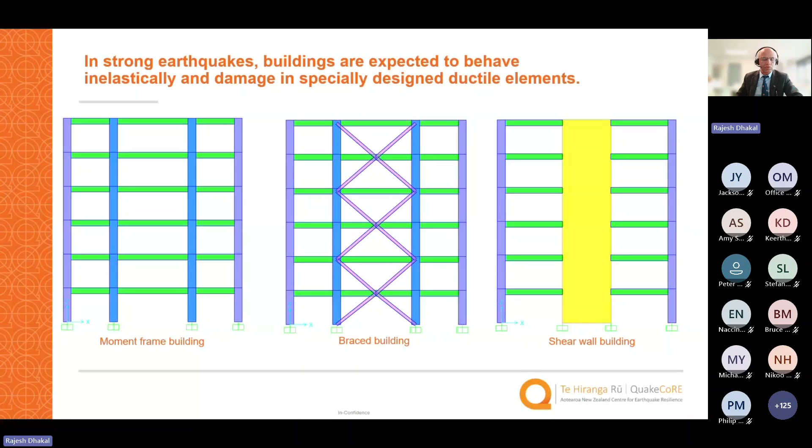And in strong earthquakes, stronger than design earthquakes, obviously there will be quite significant damage to these structural components, making it dubious whether they can be repaired and restored to their pre-earthquake level or not.

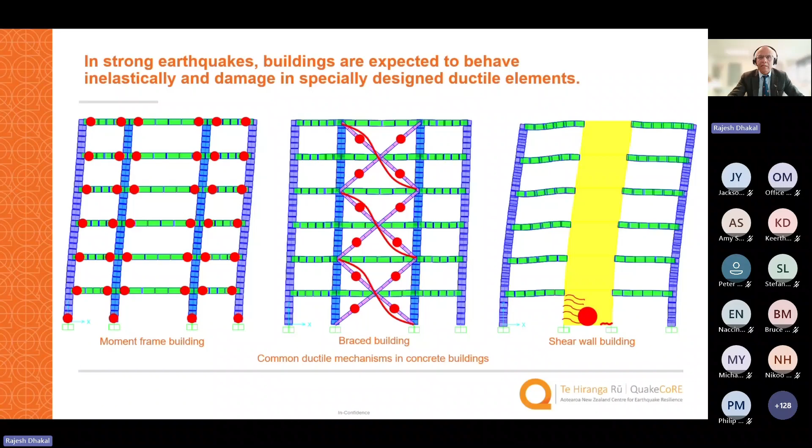Here are some illustrations of common structural systems. Damage in concrete structures, as you all know, is not easy to repair, mainly because of two things. One, by nature, concrete gets cracked. But inside the reinforced concrete, once they develop plasticity, the elongation, the permanent extension of those plastic hinges makes it difficult for these hinges to be repaired and look like the original members they were before the earthquake.

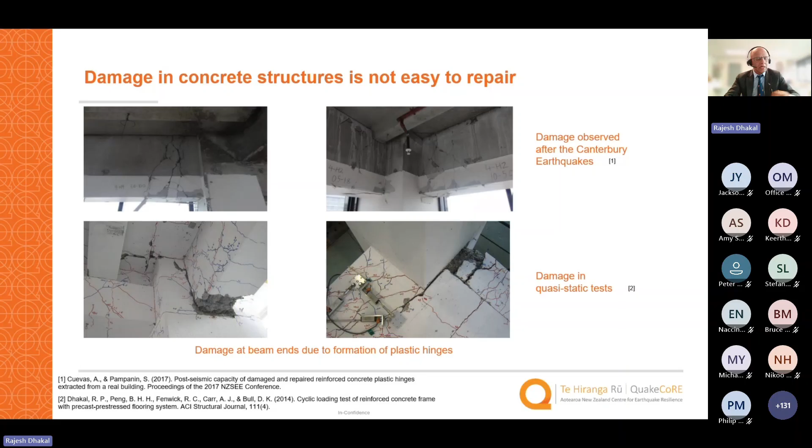So in particular, when this damage does happen to floors, that makes it even more tricky and challenging to repair. In most cases, barring some exceptions, once the floors get damaged, the buildings end up being demolished and rebuilt.

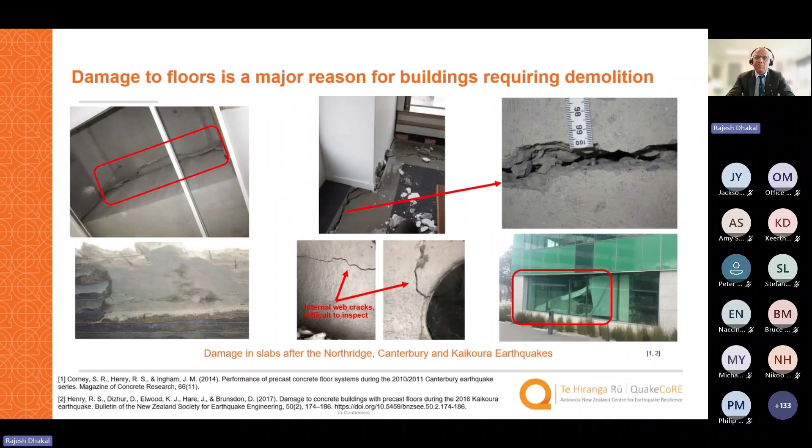We have seen several examples of this in recent earthquakes, be it the Canterbury earthquakes or even the Kaikoura earthquake, where buildings in Wellington and Christchurch underwent significant damage to floor systems, and that was one of the main reasons why these buildings had to be demolished.

Precast construction is one of the common forms of construction, especially for concrete buildings. Do precast construction techniques help in getting rid of this problem? Let's revisit that. The concept of precast construction is to assemble prefabricated components, but traditionally using on-site concreting for connecting the prefabricated components, and the end product is a monolithic connection.

The claimed advantages are quicker construction, because you are not casting a lot of the structures and members on site; better quality control, because the prefabricated components are made in a quality-controlled environment in the factory or yard; and obviously less on-site labor and formwork.

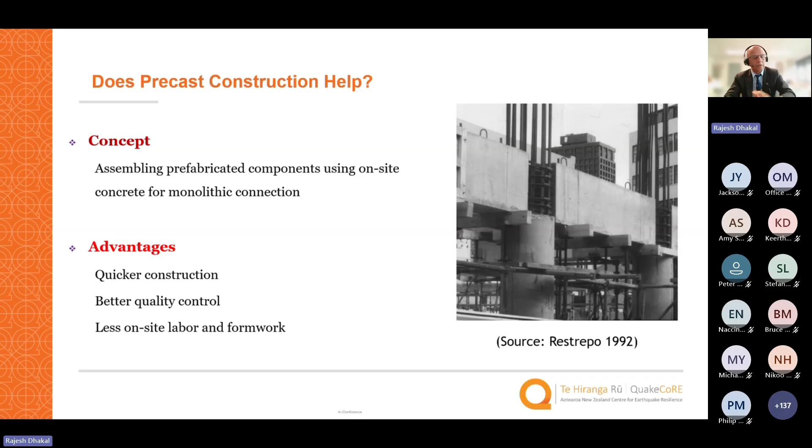However, the conventional approaches of assembling precast buildings by pouring concrete on site to connect different components is actually counterintuitive in terms of those claimed advantages, because that requires formwork and curing time for those on-site concrete joints, which delays the construction process and doesn't give the advantage of rapid construction as much as you'd like.

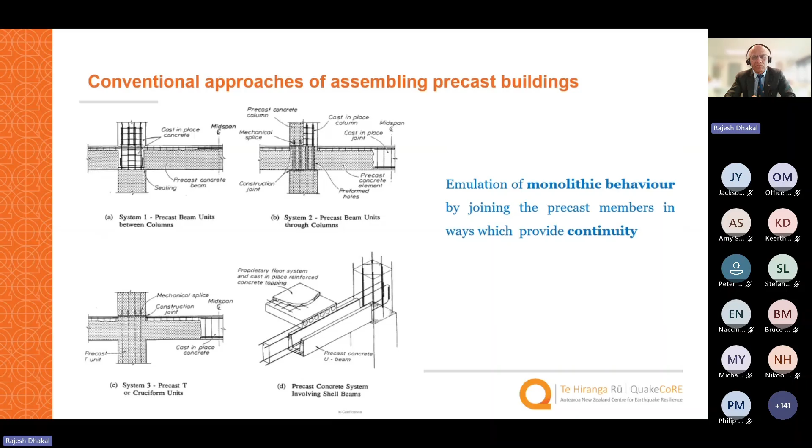There are several issues with these monolithic precast structures, or even traditional reinforced concrete construction. The first is that these structures require demolition whenever there's significant damage after an event, or even without damage, if the property owner decides to change their plan or modify the structure's functionality. More often than not, that has to be done through demolishing the building and building a new one.

Demolition by nature is a very disruptive process environmentally, causing significant wastage of materials which are non-biodegradable. That just adds to the landfill. It's a time-taking process, and it costs a large amount of money and energy.

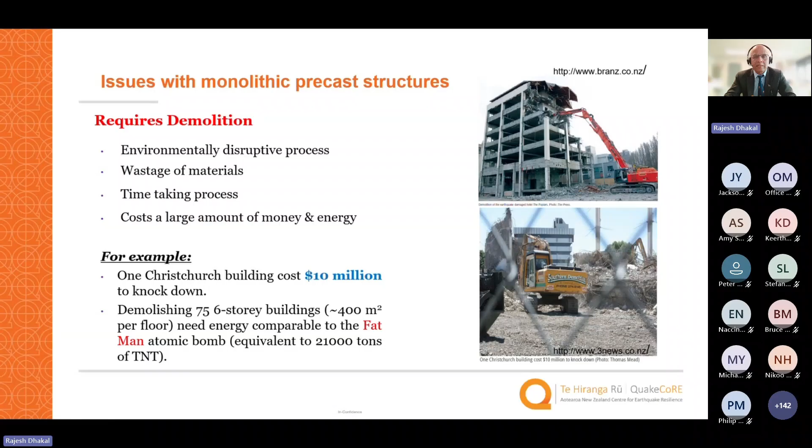The other issue with monolithic precast construction, the one we are directly dealing with in this research, is vulnerability of precast floors. Precast floors are connected through a topping slab with the structural members, as is traditional practice. Such connections invariably get damaged in minor to moderate earthquakes—you don't need a large earthquake for them to start creating cracks and incompatibility-induced damage around the perimeter.

If the seating is limited, like for precast floors seating on the end beams, then because of elongation, they can fall, which can lead to life safety hazards. Repairing floor damage is often very uneconomical and impractical. Whether it's technically feasible, we don't know—there's a big question mark over that. But most of these buildings have been forced to be demolished after moderate to major earthquakes.

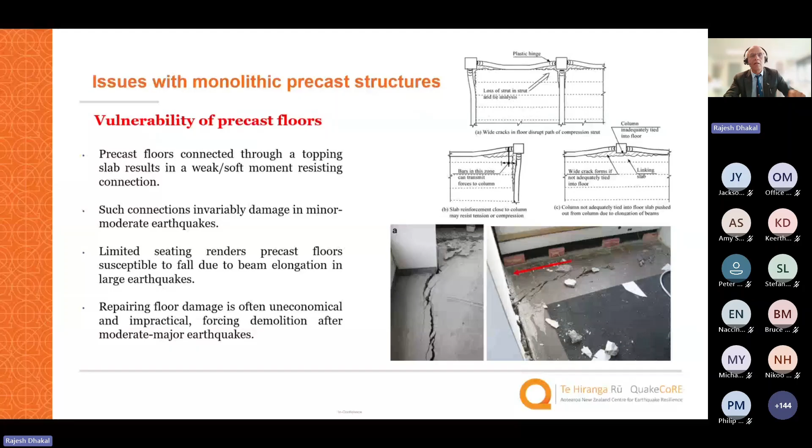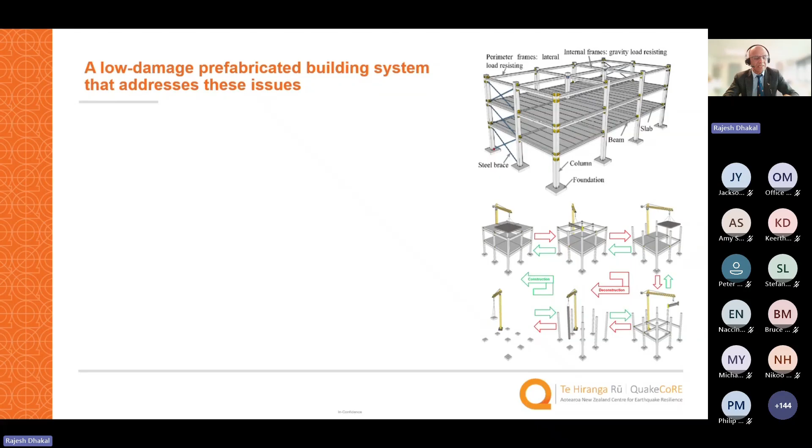We are working on a low damage prefabricated building system that addresses these issues and several others inherent with monolithic precast construction. The first issue is construction speed—traditional precast construction limits this advantage, but the system we're proposing is faster because it uses dry steel connections to connect structural members, between floor and frame, floor and wall, beam to column, column to foundation, etc. It completely avoids on-site concreting.

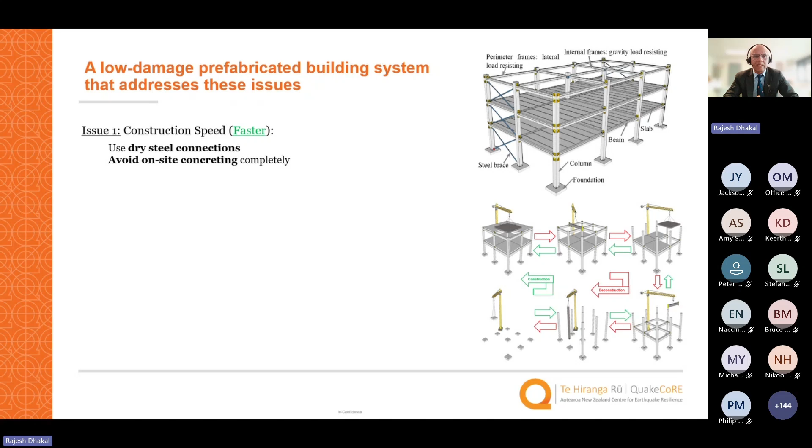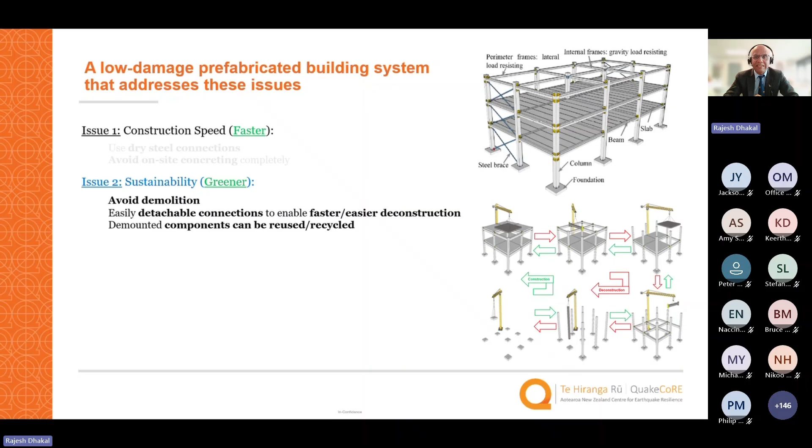The second issue I mentioned is sustainability. This system is greener because it completely avoids the need to demolish. It uses easily detachable connections to enable faster and easier deconstruction. You can detach and demount components, and these components can be reused and recycled when another opportunity arises where the same type of connection or members are needed.

The third issue is the vulnerability of precast floors that I talked about. The system we're proposing is safer because it avoids the topping slab connecting with perimeter structural components, meaning the floor is connected to the structure through discrete floor-frame connections made by steel members. So we don't have that vulnerability typical of monolithically constructed precast concrete structures.

The other issue is lack of seismic resilience—in order to build back the building after some damage, because in concrete buildings, we've seen the majority of damaged concrete buildings being demolished and rebuilt. This system will make buildings more resilient because it uses low damage connections to join structural members between floors, beams, columns, etc. So in moderate or even large earthquakes, the damage will be heavily minimized.

But when you have very large earthquakes, the damage will have to occur somewhere, and we limit that damage to easily detachable and replaceable components. So rather than thinking about repair, we replace those damaged components, and in a short amount of time we get a building similar to what it was before the earthquake. There's no ambiguity about whether you can repair it back to the pre-earthquake level, because in this case you're replacing the damaged components, so everything is like new.

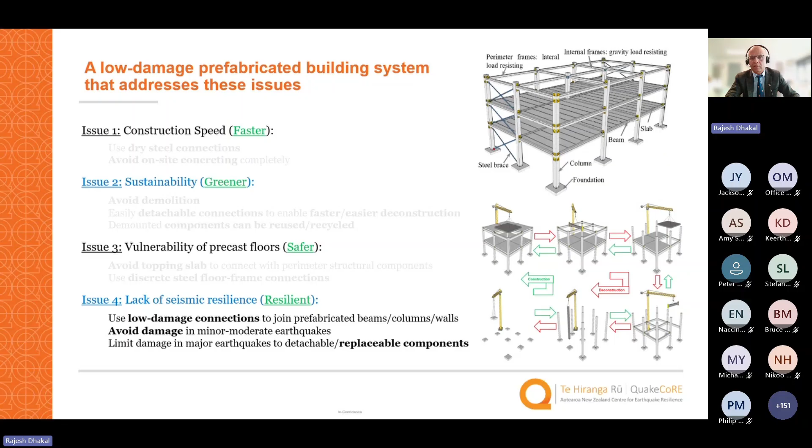So precast floors are vulnerable mainly because of the way they are connected. This is the hypothesis I'm making: even if you use a very stiff steel plate as your flooring system, if you connect it the way we traditionally do, the floor will still get damaged. So it's not about the precast flooring member—it's about how we connect them to the surrounding structure. That is the main reason we're getting damage.

The way we use topping slabs with lightly reinforced mesh, with the reinforcing bars going all the way to the end beams, creates a moment-resisting connection between the floor and the beam, which is weak and fragile.

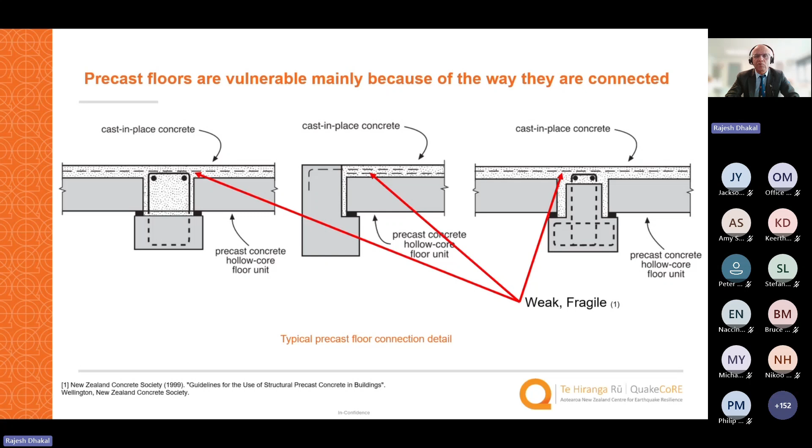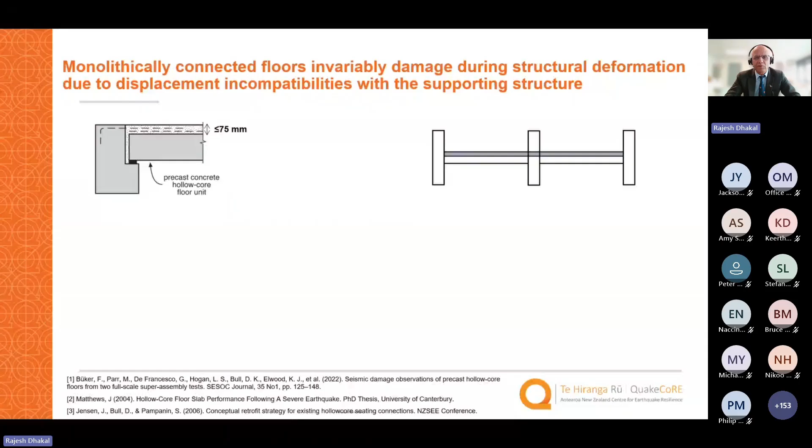So the moment resisting connection has very limited capacity to withstand rotation and moment. Because of that, what we have seen is the monolithically connected floors invariably get damaged during structural deformation in minor to moderate earthquakes, mainly because of displacement incompatibilities with the supporting structure.

All of you have seen these kinds of illustrations showing the negative moment failure and positive moment failure in several other presentations about precast floor and hollow core floor in particular.

When the building has to deform in one direction, there will be negative moment developed in that connection, which will create damage starting from the top. And when in the other direction, the positive moment that develops will create cracks from the bottom of those floor slabs.

Not only that, when the buildings deform, the beams try to deform in that typical elastic double curvature, even in the elastic range, whereas the floor doesn't want to follow that same pattern of deformation. So in that interface between the floor slab and the beam, there will be a lot of conflicting stresses developed, which will create quite substantial damage at that interface.

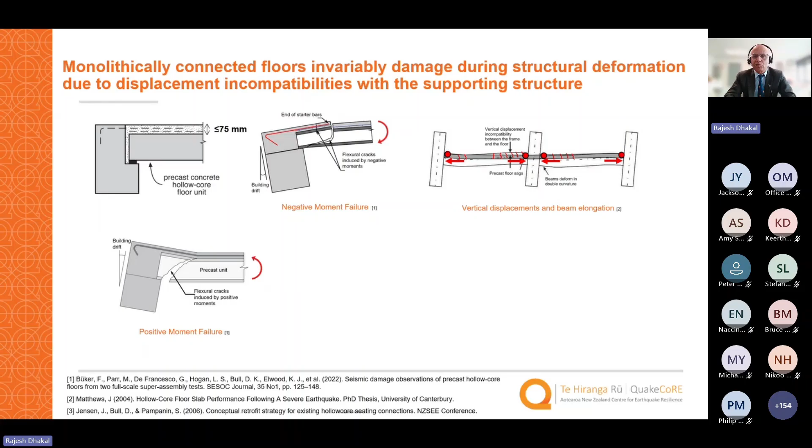Not only that, when cyclic loading takes place, the ends of the beams where plastic hinges develop, these hinges grow in length, which we call beam elongation. So the columns are trying to move apart because the beam is getting longer and pushing the column outside, and that creates another type of stress in the floor, which is connected to the beams, exacerbating the damage even further.

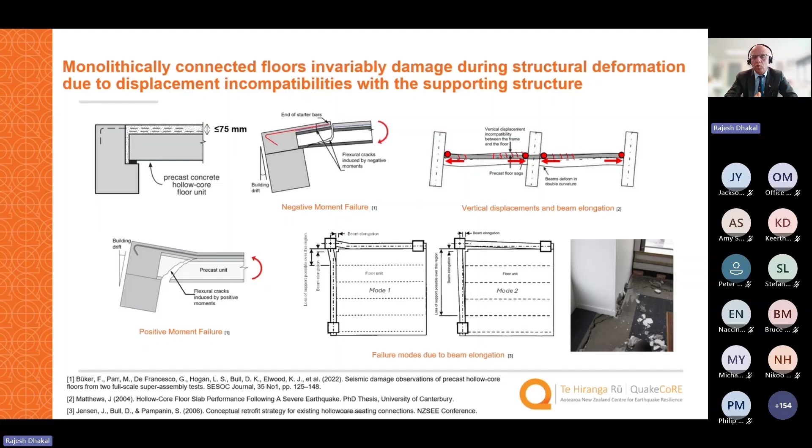We have seen this kind of illustration based on concept, as well as in the Clarendon Tower in Christchurch, where exactly this type of damage around the column in the floor-beam interface was visible after the Canterbury earthquakes.

The design challenge associated with monolithic slab frame connection, in addition to the issues talked about earlier, there is a further issue related to strength hierarchy and seismic performance, which can be compromised. In capacity design, strength hierarchy is important. Beam being weaker than the column is important because we want to control the performance of the structure through well-detailed plastic hinges in the beams.

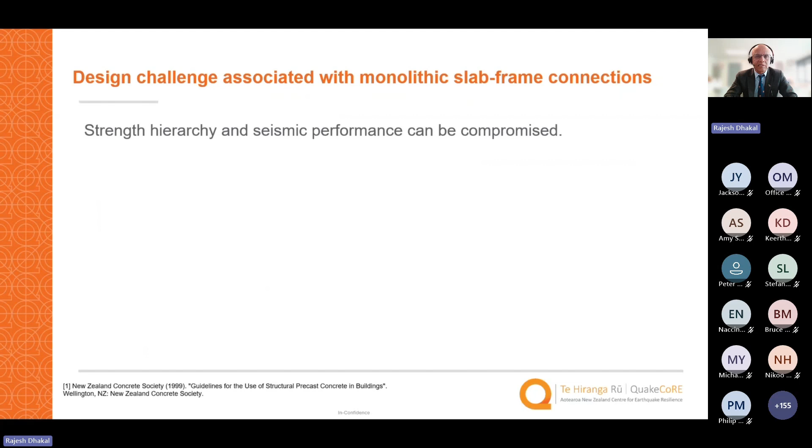Beams getting stronger, in isolation, you might think this is good, that we're getting better performance out of the beam. But at the system level, beam getting stronger than the columns will be a disaster, because that will lead to an undesired column failure mode.

That is a typical problem that we get because of these monolithically connected floors. When you have floors connected to beams monolithically, then a part of the floor will participate in the beam strength, especially the negative strength of the beam. But how much of the slab contributes to the beam? That's a question with a lot of uncertainty.

If you look at the New Zealand standard, Japan standard, or US standard, they each give an equivalent width of the slab in a different way, leading to different outcomes. Not all of them can be right—only one of them can be, and even if one is right, the others are wrong. That creates quite a bit of risk in terms of beam strength.

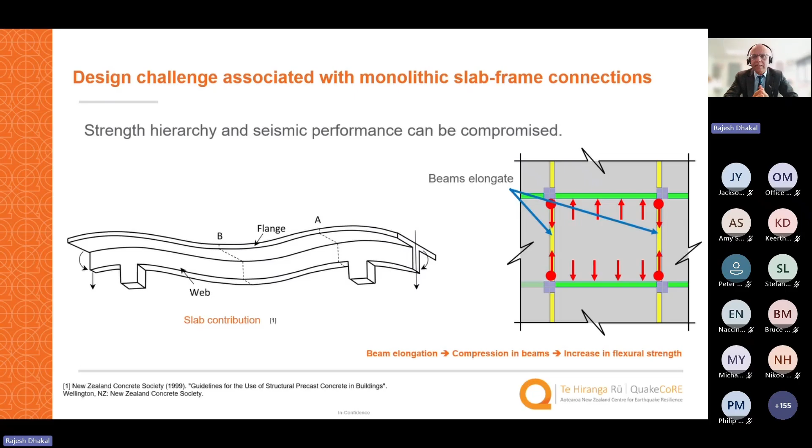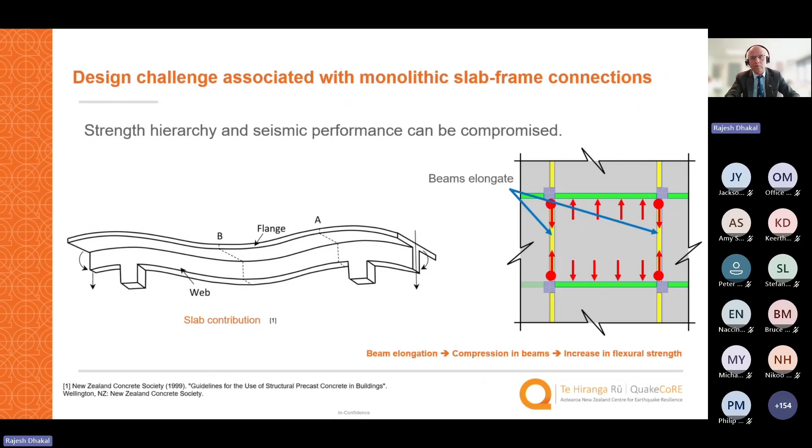Not only that, when the beams elongate and try to push the column outside, the column tries to resist it, so axial compression is developed in the beam. When there is axial compression in the section, the moment capacity is higher—you can confirm this through section analysis. So these two things tend to increase the beam strength, which can alter the strength hierarchy and even the failure mode of the building, which is undesirable.

So in order to solve these issues, we have proposed a low damage floor connection. In this research, we are focusing on this aspect, which feeds into the bigger aim of getting a low damage prefabricated building system as a whole. But here we are concentrating only on the floor to frame connections.

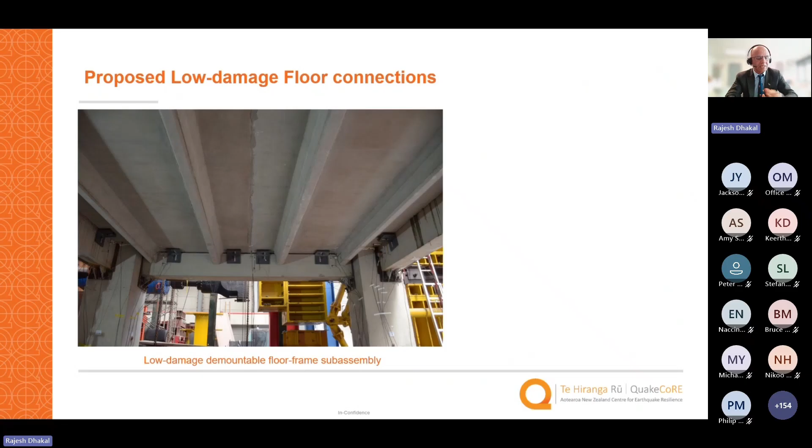In this connection, the floors are connected to the surrounding frame using steel angles which have slots in two directions, as shown in this figure. These angles have a rubber bearing strip below the floor, a slotted hole where a bolt is installed in a duct in the slab, and another vertical slotted hole where a bolt can be cast in the precast beam.

On both sides, in the end beam you can see some stiffeners in the connection there. Let me see if I can show you.

No, I cannot activate the pointers.

You can see the end beams and end connections. They have stiffeners because we want those connections to act as a backup in case unseating happens, a backup for the gravity system, so that the floor doesn't fall down. It is extra redundancy in supporting the floor. So this is the concept we want.

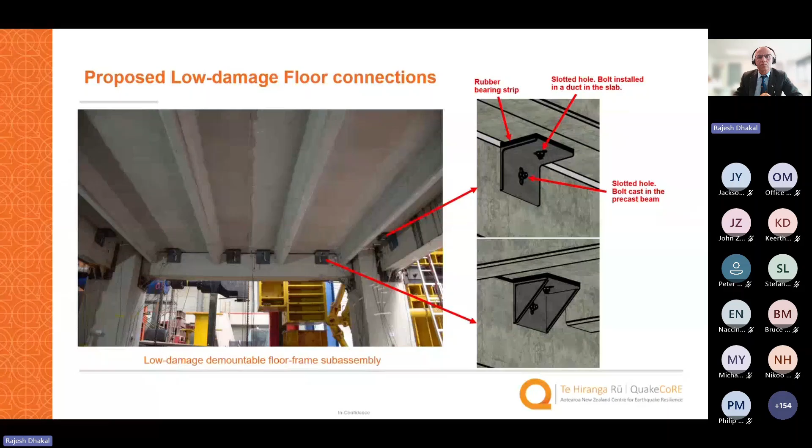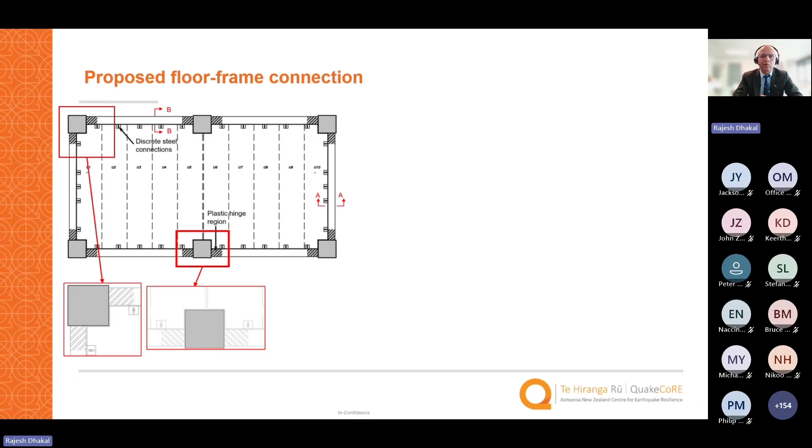The proposed floor frame connection, the floor looks like this in the surrounding structure, with connections all around the perimeter. The key feature is that we don't put any discrete steel connection at the beam end where plastic hinges form, because elongation there could disrupt these connections or pull the floor together when the beam elongates. So these connections are all outside the plastic hinge region.

That's the first point. Second, this is how these connections are placed at the two ends, in section AA and section BB. When the beams rotate in the two directions, there is no positive or negative moment failure, because the connections, especially with the slots in the two directions, can easily accommodate the relative movement between the edge of the floor and the beam. Similarly, in the other direction, the same thing happens.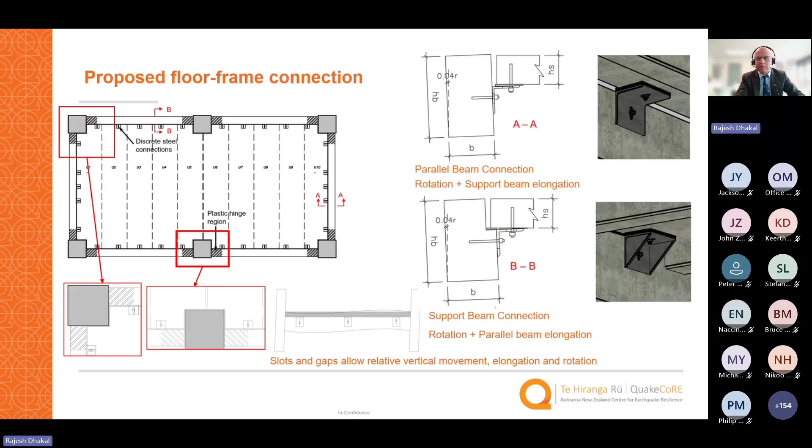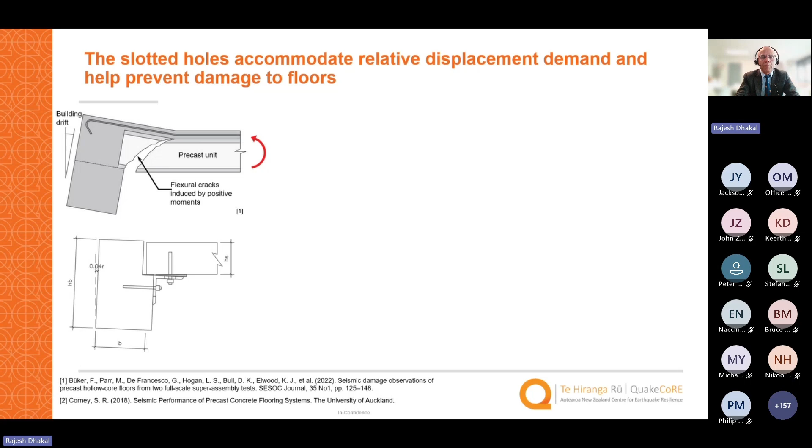So it has the ability to withstand the relative displacement demand between the floor and the supporting beam. The slotted holes accommodate this relative displacement demand and help prevent damage to the floors. Instead of the positive moment failure seen in traditional floors, now the floor and beam deform as shown below in the illustration. Similarly, instead of negative moment failure, the beam just moves outside, and the rubber pad underneath allows some deformation to accommodate that rotation, along with the slot.

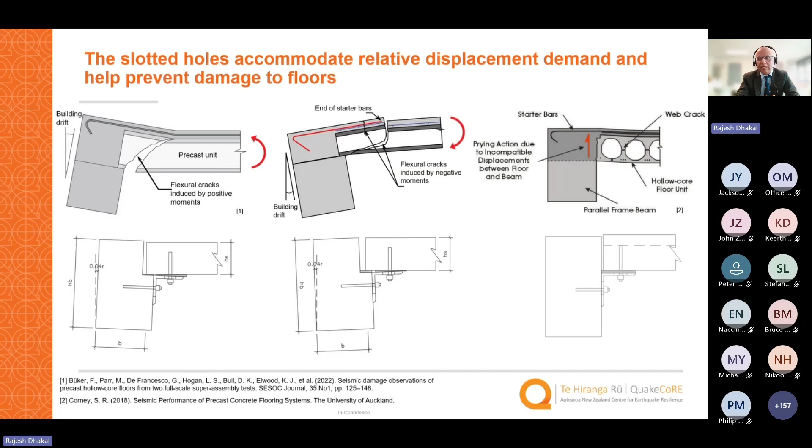Also, looking at the side connection, because of how the side of the floor connects to the beam, there is no need for them to behave monolithically, so any additional deformation can be accommodated. The connections are there to transfer the inertial forces, unlike traditional flooring systems where inertia is transferred throughout the perimeter through the monolithic connection.

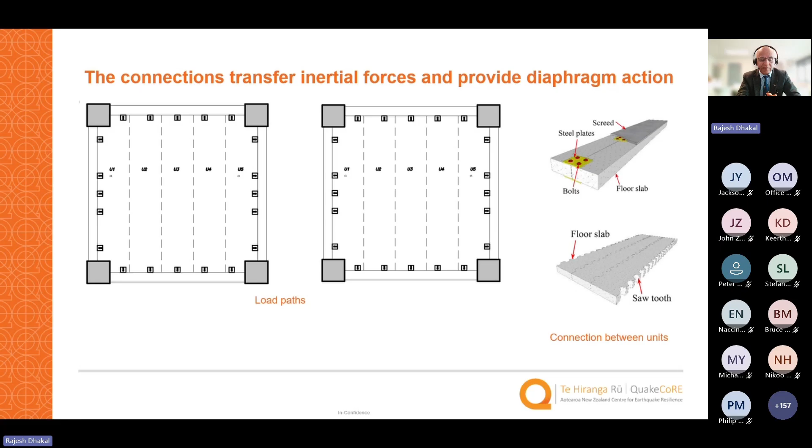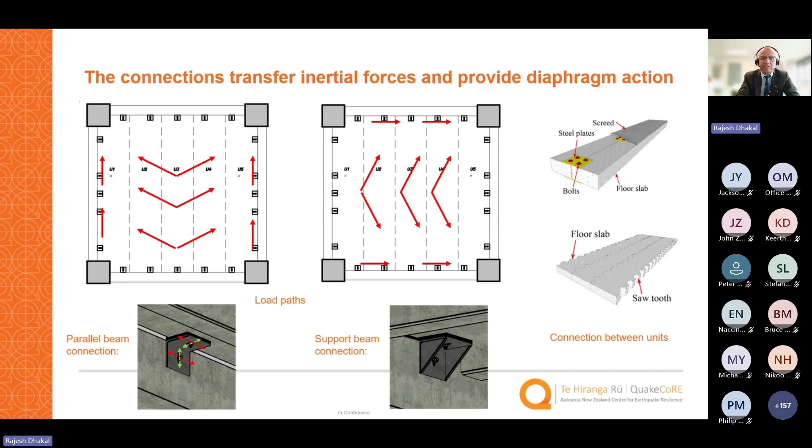In this case, the inertial forces are transferred through those discrete connections. If you recall, these connections have movement in the direction where inertia needs to be transferred that is restricted. We have slots in the other two directions allowing relative displacement, but in the direction shown by the red arrow in the bottom figure, there is no room for the floor to move, because any stress developed there is transferred directly through that connection to the beam. That's how the inertial force is transferred.

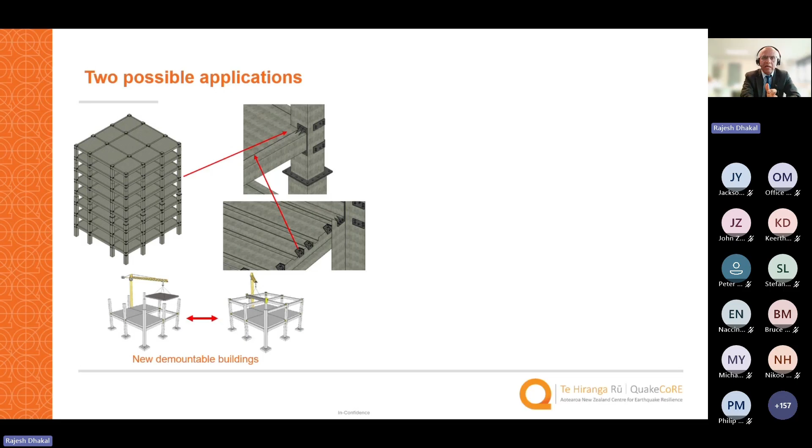This kind of connection has two possible applications. The first is in new demountable buildings where the precast floor slab is put on top of the beams, and then connected from the bottom using these connections, as shown in the new prefabricated building system. The second application is retrofitting existing vulnerable buildings with precast flooring systems. So how do we do that?

You put these connections underneath and fix them to the floor and the beam with post-anchored drills, using epoxy injected drills or another post-anchoring mechanism. Then you cut the monolithic connection between the beam and the floor, and fill that with compressible material. With that, you get exactly what we would normally do in new buildings.

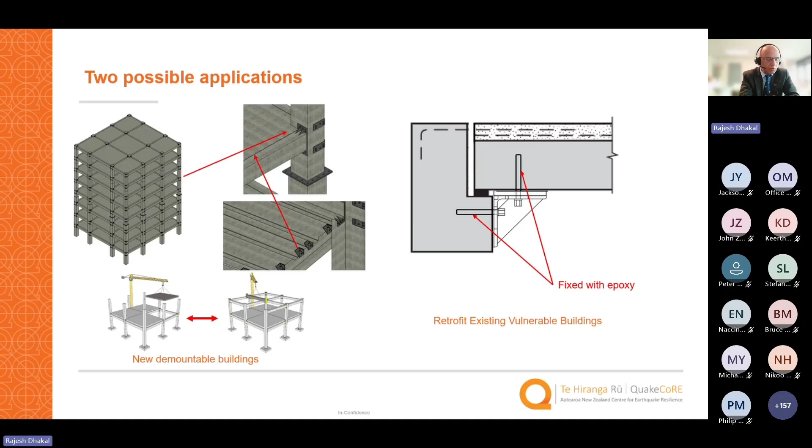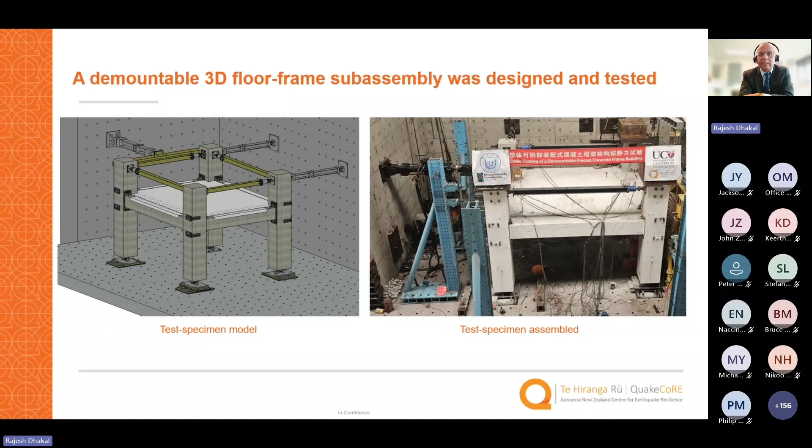The precast beams and columns, especially the beams, were cast with an end plate which had holes to bolt them and connect to the column. The columns were prepared with pre-installed holes to take those bolts through, and reinforcing bars were welded to those end plates, which also had stiffeners as shown.

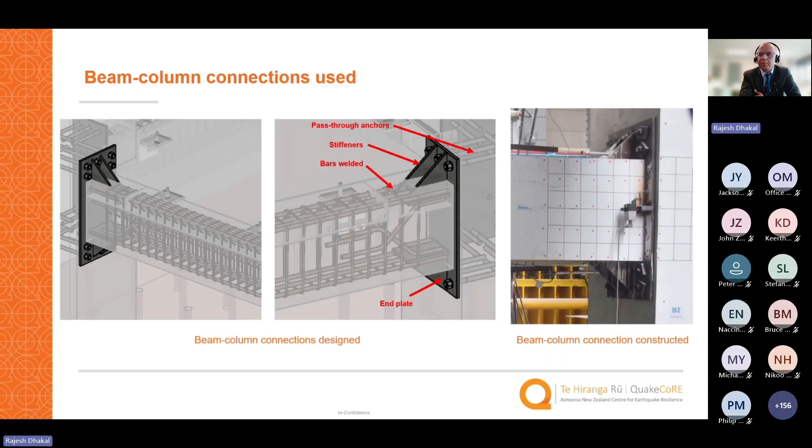When they were fabricated and then connected at the site, this is how they look. The end plates were connected to the column face by bolting them through the holes already provided on the precast columns. After all the assembly of the four beams and four columns, this is how the specimen looked.

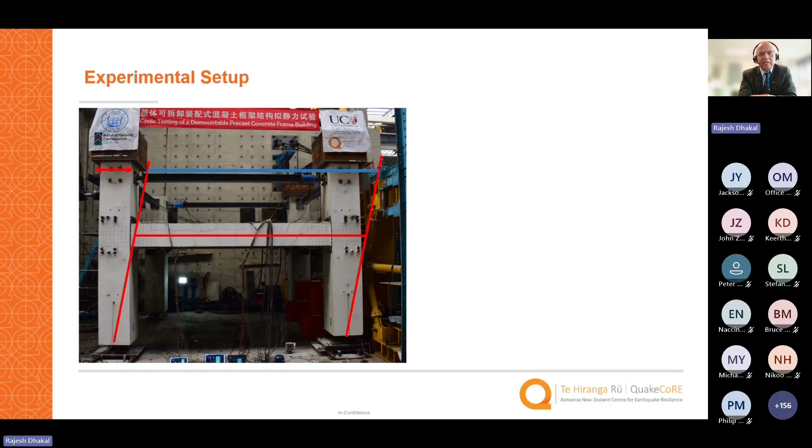But there are some challenging bits here, because we wanted to test it in unidirectional as well as bidirectional cyclic loading. When you do that, beams will elongate, and in order to not restrict the elongation of the beam, the bottom support of the columns had to be carefully designed. So out of the four columns, one column in one corner was pinned, the two diagonally opposite columns were provided with linear bearings, and the one at the other extreme corner had bidirectional bearing, because that column had to move in both directions as elongation could happen to both beams.

So we pushed it, and the bottom slider would move outside - I'm showing here the bidirectional slider as well as unidirectional slider at the bottom of different columns. But when we move, because of the beam elongation, the bottom slider would slide outside, and what it would result in is the two columns not being parallel. But we also wanted to maintain the parallel attribute between the two columns.

So what we did is, that blue line you see there is actually a steel beam connected to an actuator. Using that actuator's hand control system, after every cycle of loading we adjusted it to make sure the columns were parallel after each cycle, or at each peak. Then we followed up with the next cycle and did the same thing - it would lose the parallel feature, and the rotations of the two columns were not equal, especially in the large inelastic range of displacement. That's how we managed it.

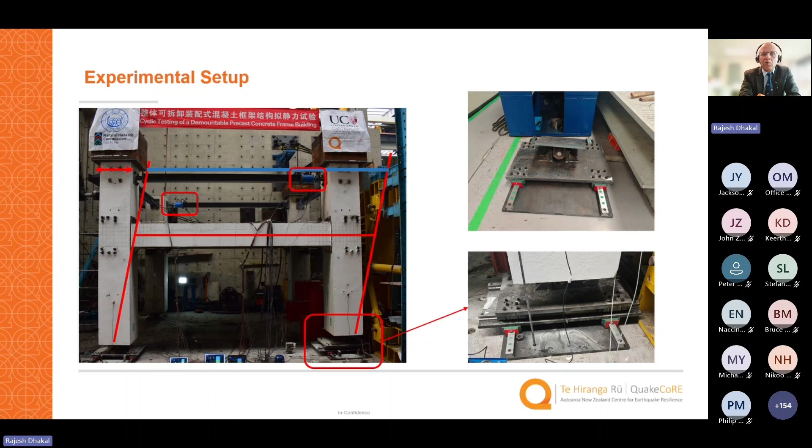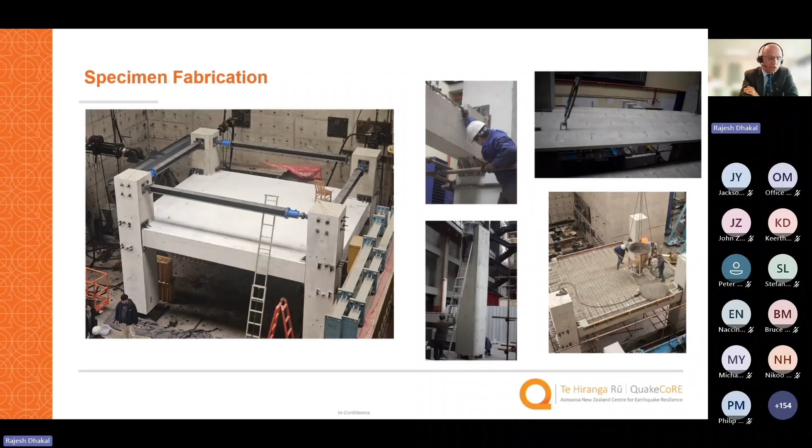Please remember, although the original idea is for new design, we wanted to prove this can also be used for retrofitting. That's why we first connected it as we normally do, getting the vulnerable precast flooring system because of this monolithically connected topping, and then we prove it can be used for retrofitting. So ultimately, after all the pouring, this is what it looked like, exactly like what we get in actual practice.

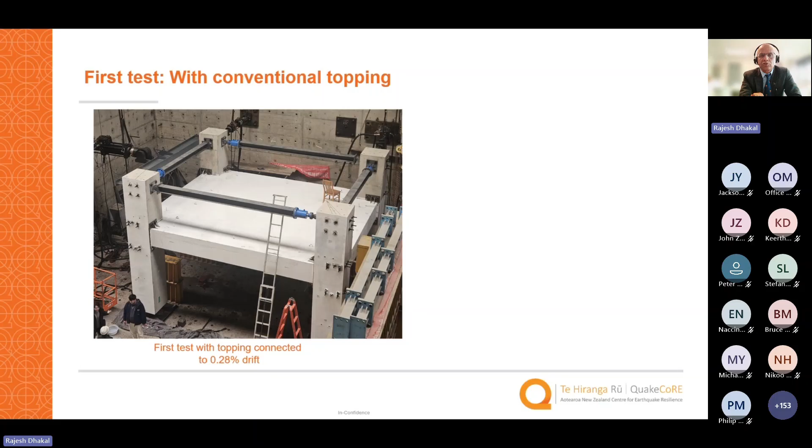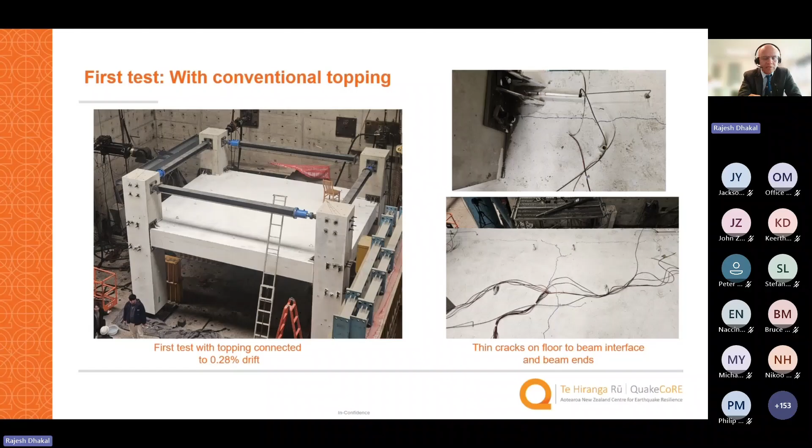We tested with conventional topping, so the testing was just pushing. You can see the actuators - one from one direction and two from the other direction. When we started to load it, after the first few small cycles, we already started seeing damage. At 0.28% drift, you can already see damage in the floor-to-frame connections, in line with what was observed in the Canterbury precast test two years ago and in other literature. So there was no point carrying on, because we would get the floor damaged very badly if we proceeded - we stopped the test there and applied our retrofitting technique.

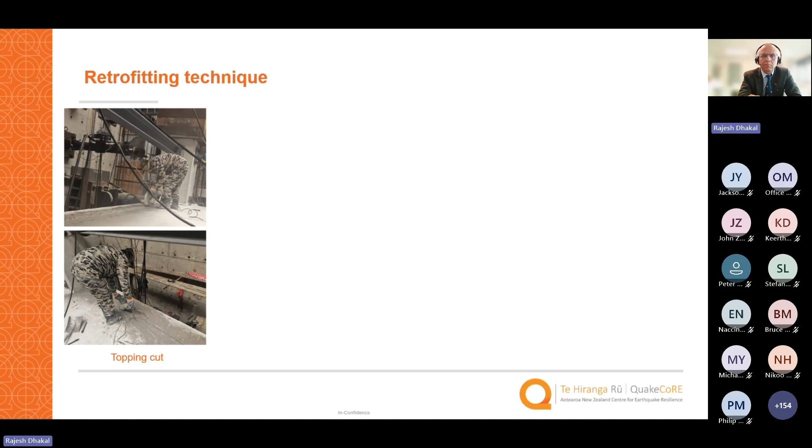So we saw-cut the connection between the floor and the beam, and then put those dry steel connections with slots, as explained earlier, underneath the floor in different parts. Now you get a flooring system where, although there is topping, it's not mechanically or monolithically connected to the beam - there's an all-around gap. Only around the corner, very close to the column, we could not cut completely because of the circular shape of the saw cutting machine, so there was some small part still connected. Otherwise, it was all detached.

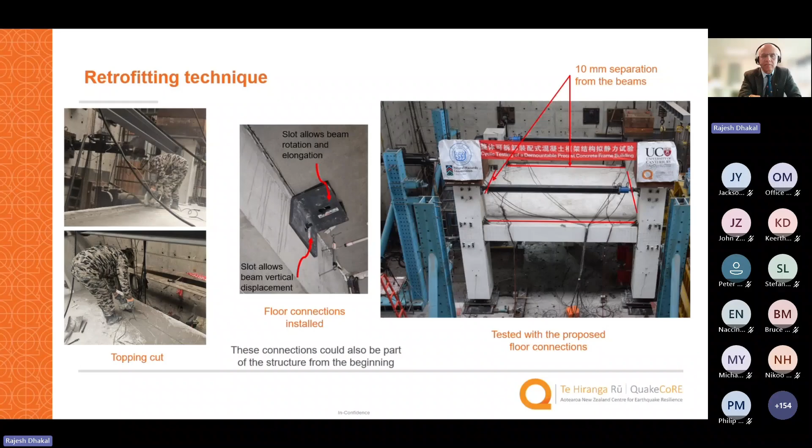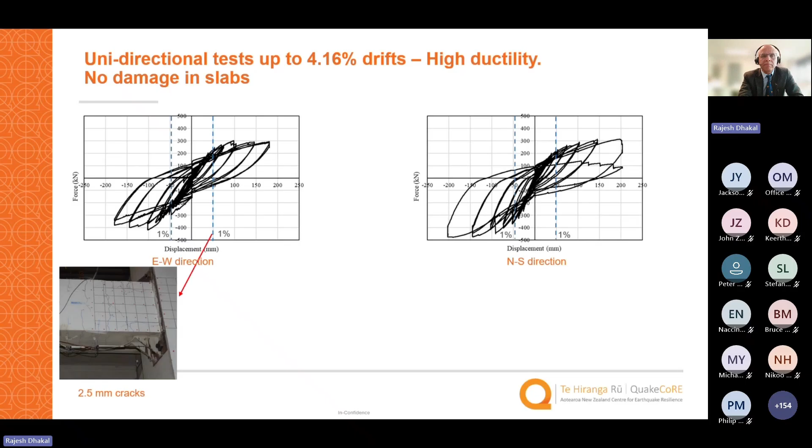Then we applied unidirectional tests up to 4.16% drift - gradually increasing displacement in one direction, then in another direction. You can see the load displacement curves in both directions show very stable ductile behavior, as we see in monolithically connected frames. But during these drifts we started seeing damage in the beams, because beams were intentionally designed to be weaker than the columns, so they were controlled in design, and damage was restricted to the beams as we had envisaged in the design phase.

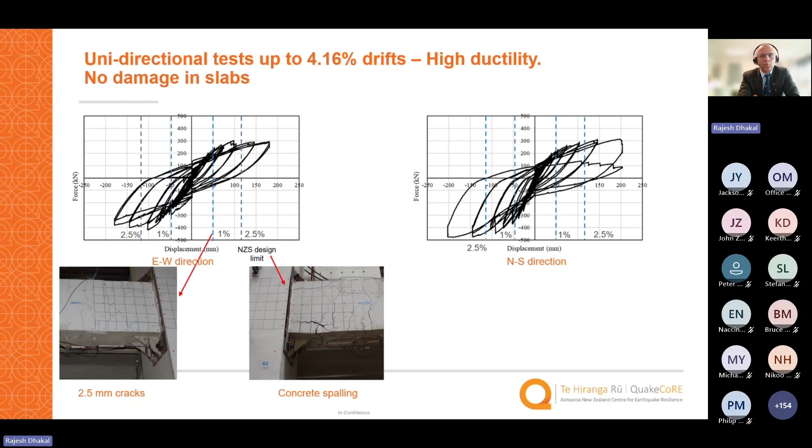At 2.5%, which is typically the ultimate limit state, we started seeing quite significant cracks and yielding and plastic hinge formation. We continued the loading up to beyond 4%, where you could see clearly the bar fracture and quite substantial collapse of the beam, or the failure of the beam, we would say.

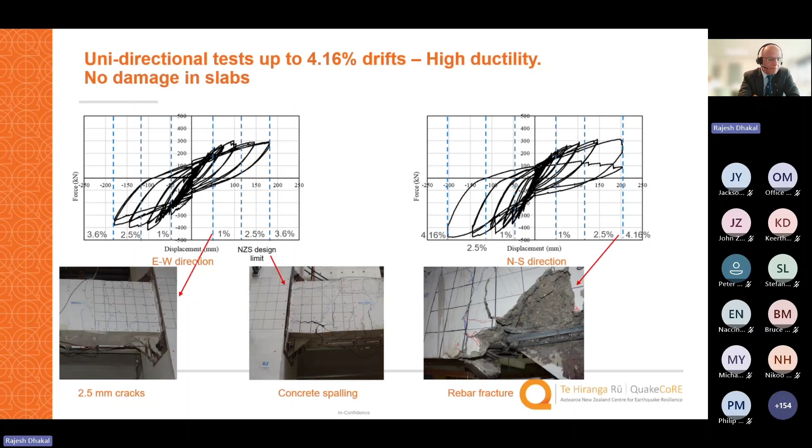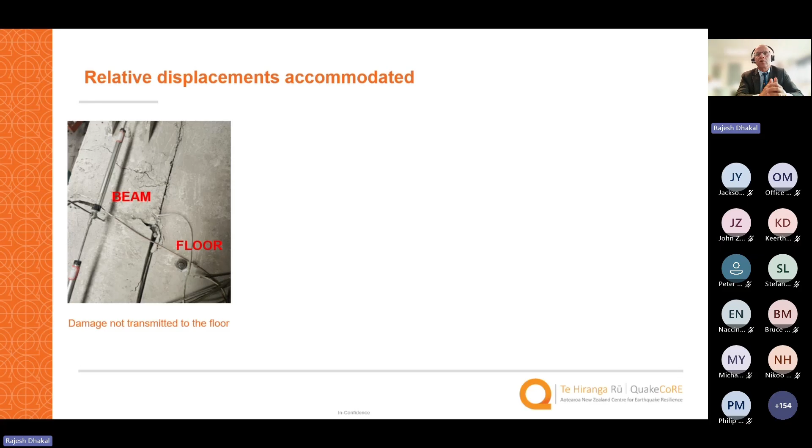But despite taking it to that measure, that much displacement and causing so much damage to the beam, none of the damage passed onto the floor. You can see the damage stopped in the beam because there was no mechanical connection between the floor and the beam, and the connection underneath gave up, or accommodated that displacement and deformation because of the slots.

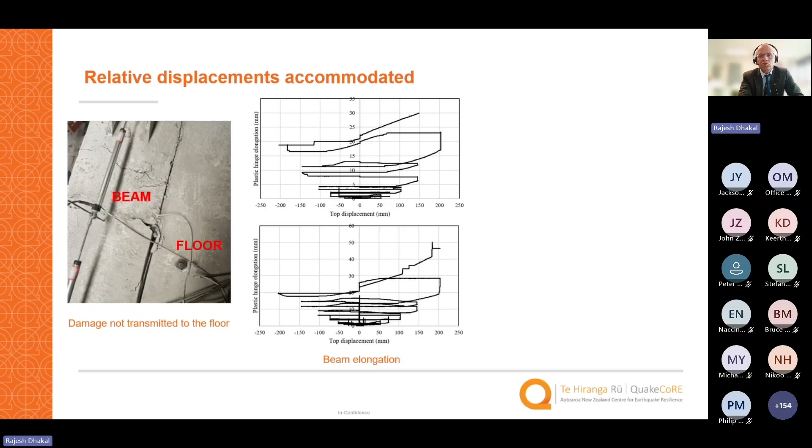In terms of beam elongation, we measured the elongation in the two ends of the beams and roughly got about 20-25 millimeters of elongation at that final drift level. So altogether, the columns were moving apart by about 50 millimeters or so.

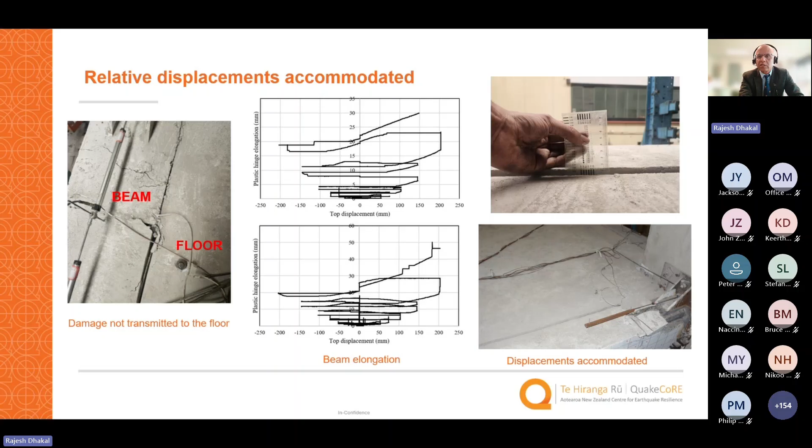And even in terms of the vertical compatibility, when the beam was trying to deform vertically, the floor didn't have to follow it because the slot in the connection underneath could accommodate that. So there was no problem, no damage whatsoever to the floor.

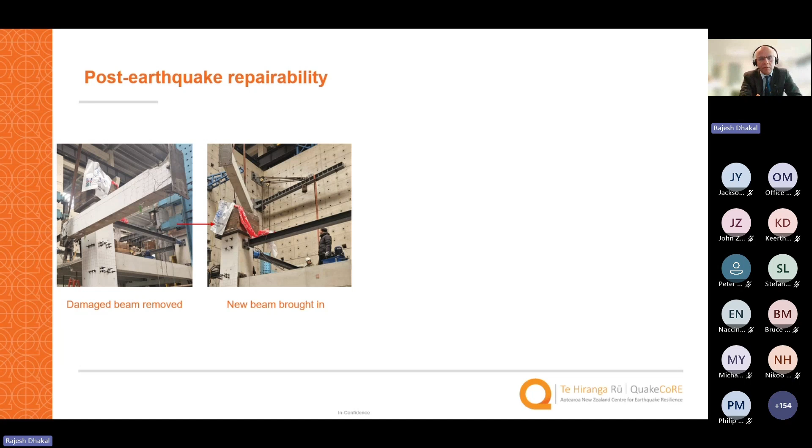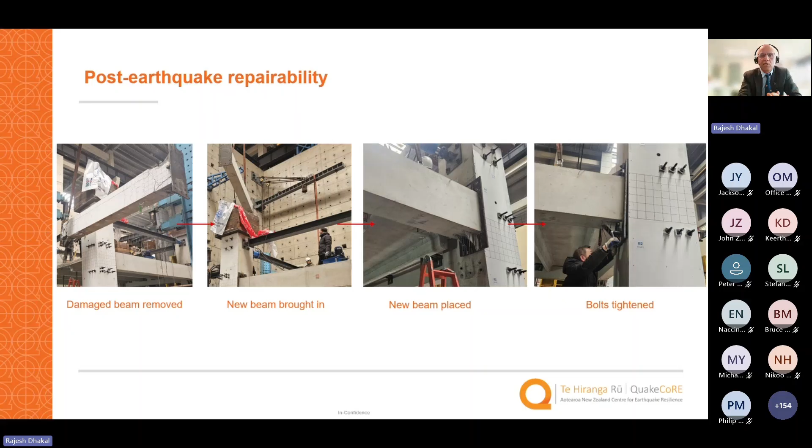Now, post-earthquake repairability - because this beam was damaged as designed, we wanted to replace it with a new beam so that the structure gets completely new. So the damaged beam was removed, a new beam brought in, and connected again through those bolt holes, and then bolts were tightened, and we get the structure as it was, because you could connect the floor to the beam using the same angle connections underneath.

This is the first time the technicians in China were doing anything like this. We just explained the concept and they moved the damaged beam out, brought a new beam in, and fixed it, and all of that took one hour - for the very first time ever. Obviously, once they get used to the nuances and challenges associated with this phase, they can do it faster.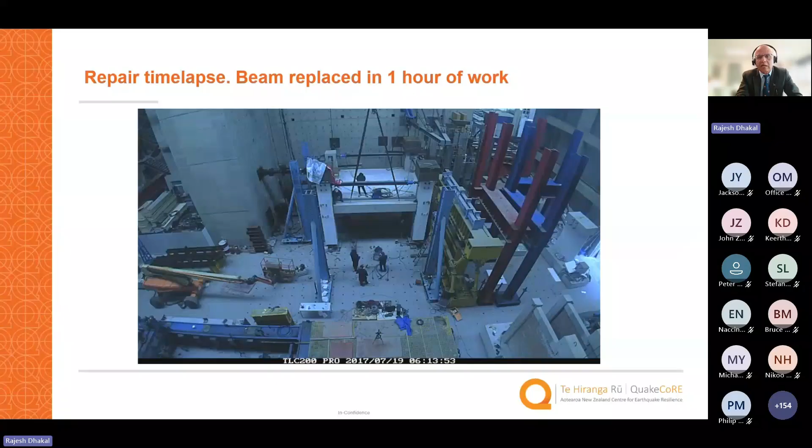But it was done. After that, we had a new structure - all those damaged four beams were replaced, and now we have four new beams. Columns were not damaged at all. Floor was not damaged at all. We have got all those slotted connections at the bottom and the beam-to-column connections as they were before. There was no sign of any damage.

And then we could test again. This time we tested bidirectional, like we applied the movement in both directions, not just one direction. And we went up to 4.16% drift.

And what we found was, again as expected, there was absolutely no damage to the column, no damage whatsoever to the slab. All the damage in the large displacement regime was restricted to the beams, and the plastic hinges did form, elongations did occur, and the hysteresis loops that we got out of these tests were similar to what we got in the previous round. So changing the beam had no effect whatsoever.

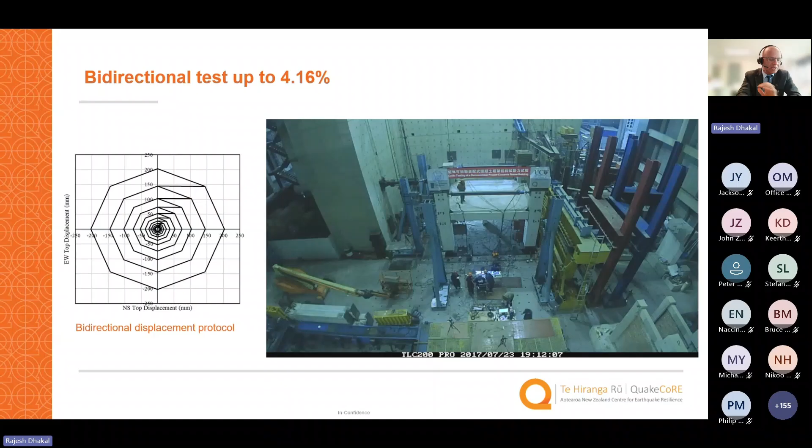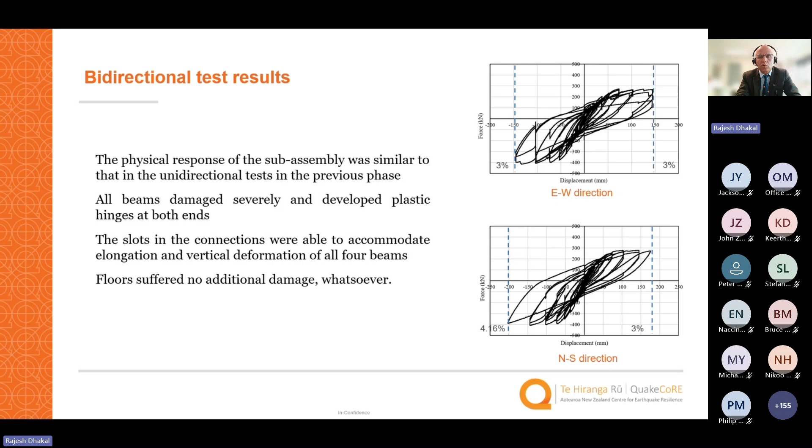So these are the bidirectional test results in the two directions, east-west and north-south. As I said, the physical response was similar to the previous test - no damage whatsoever to the floor and column. These were the things that we already did in Tongji Aili lab in Shanghai, Tongji University.

But as we speak, we are doing a subsidiary test in the University of Canterbury lab, because those previous tests validated the ability of this system to accommodate the displacement demand incompatibility. However, their ability to transfer inertial force - how much force each connection will transfer - we need to design this system, these connections. So in order to know that, we need to test their capacity in terms of the inertial transfer.

So these tests are being currently prepared. We have already cast the specimens and are preparing the setup now. The plan is to have two concrete walls with one concrete slab connected with these slotted connections. Then we push the slab cyclically to see how much these connections take, what their failure modes are if they have to fail, whether they become the weakest link in the load transfer path, or whether they are able to successfully transfer the force to the beam to ensure the beam remains the weakest element, and how many, what size, and what detail of these connections we need.

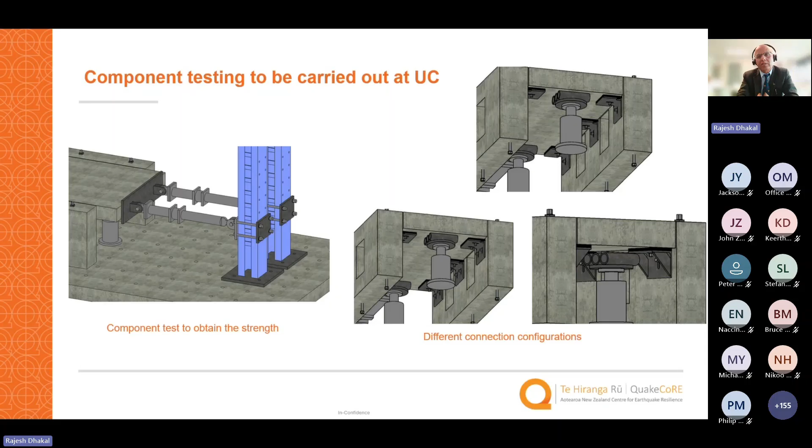All these questions need to be answered. So we are doing this. That is another phase.

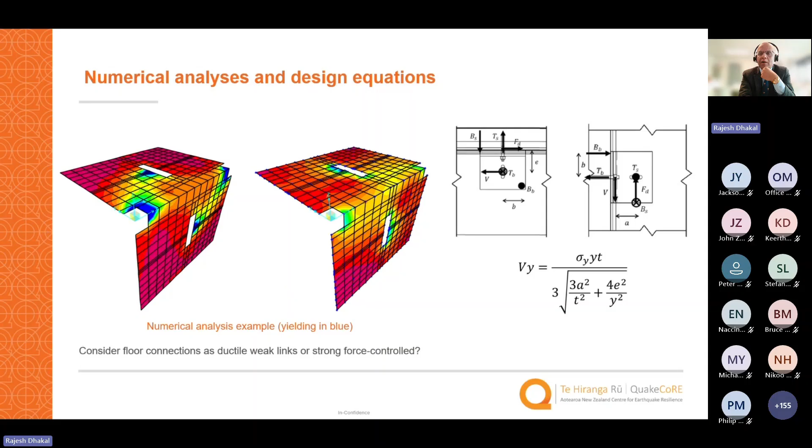And also together, we are doing numerical analysis, detailed numerical modeling to come up with the detailed failure pattern of these connections, and then coming up with simple design equations so that designers can use.

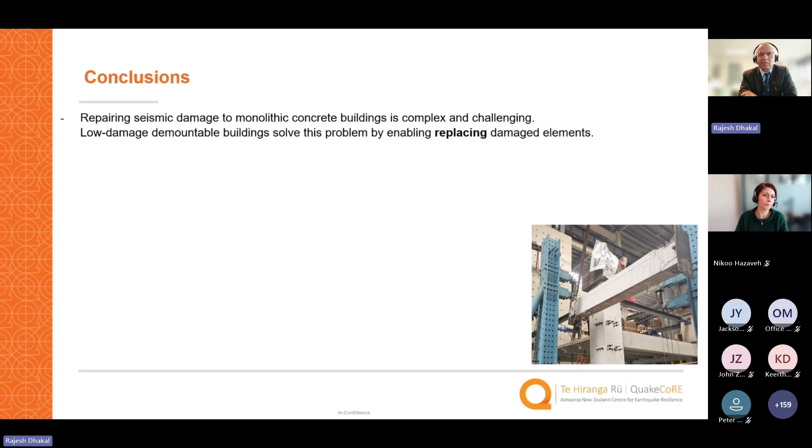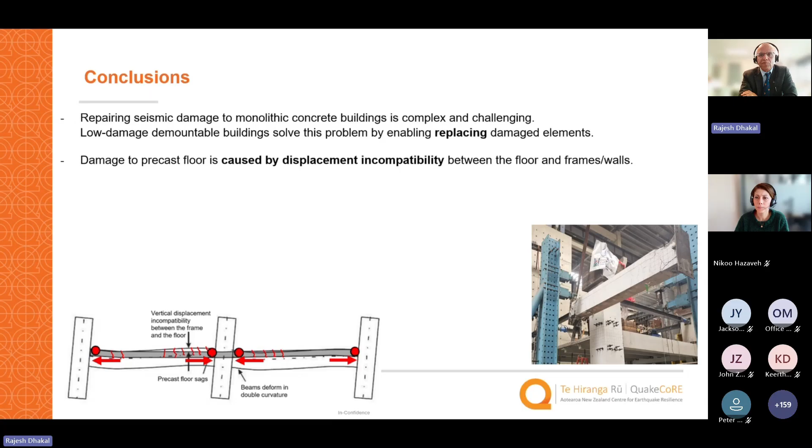So to conclude, repairing seismic damage to monolithic concrete buildings is complex and challenging. Low damage demountable buildings solve this problem by enabling replacing damaged elements. Damage to precast floor is caused mainly by displacement incompatibility between the floor and frames or walls, depending on the structural system. The proposed connection circumvents this problem by providing slots that allow relative movement, but at the same time transfer inertial forces, because in one direction there is no room for it to move.

It has to transfer the force. Full-scale tests have shown that the connection allows adequate ductile behavior of the demountable structure while permitting the floors to remain undamaged. The developed floor frame connections can be applied in new buildings as well as to retrofit existing vulnerable buildings with precast flooring system.

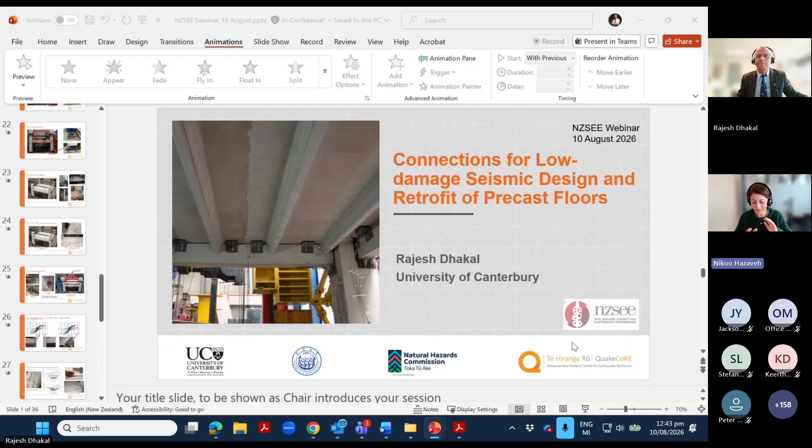Thank you so much, Rajesh, for the excellent presentation. It's very amazing. You explained very well the different types of failure. All of them are amazing, and you made it clear in one presentation.

So we have a Q&A. I couldn't see any question in the Q&A session. If you have any question, please add it there. In the meantime, actually, I have one question.

So it is very amazing that with that connection, actually, the beam does not get any damage.

And this... yeah, Nikoo, I can see the questions there, because I can see questions from Jeff Matthews here. Nick, the QR code doesn't seem to work. Okay, no, sorry for that. Actually, I thought this QR code works, but if not, then I will probably share a fresh QR code. But we would love to get some feedback from you, please. Yeah, okay, now I got it, I got it, it's coming up. So maybe we'll go for the next one.

It is Jeff Matthew: Thank you for the presentation. How economic is it to replace the demountable beam? How do you access the internal beam? Do you... the fit out and facade will need to be removed. This may lead to the repair being uneconomic.

Okay, great. Look, I think who better to ask this question than Jeff, right? Jeff, good to be communicating with you after a long time.